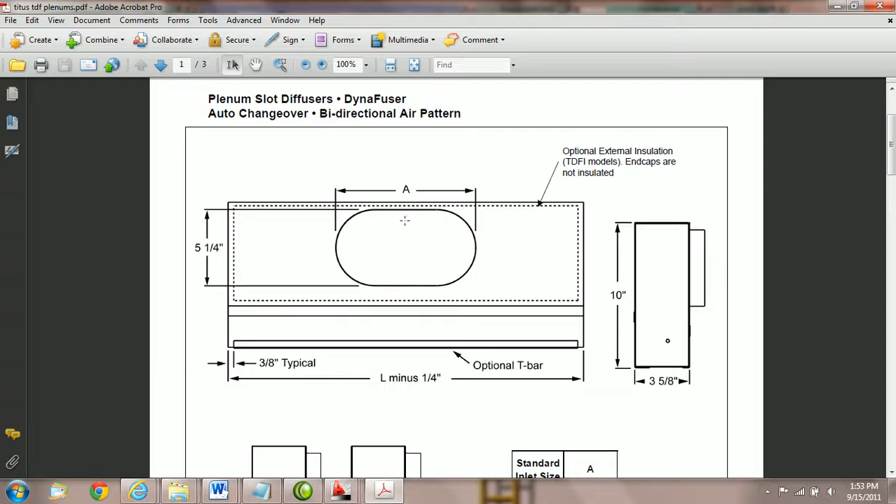The entity itself, you can see here, is a basic plenum box. We have dimensions for height and width. Dimensions are here for length. We're getting a major and minor for the oval tap. The only parameter that seems to be missing currently is the offset from the tap to the top of the box. Otherwise, the tap seems to be centered left to right.

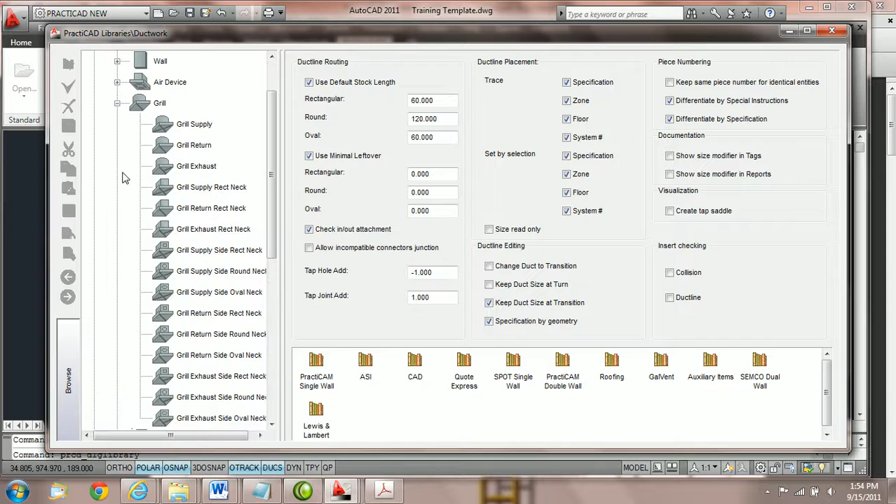So what we need to do first is go into PractiCAD, and we need to go into the library icon on your PractiCAD ribbon. And we're going to focus on the architectural section here. On the left-hand side, we need to make sure that we go to architecturals, and we're just going to hit the little plus key. PractiCAD is going to open up the list of choices. In this tutorial, we're going to focus on grills, and in particular, we're going to focus on the grill supply side oval neck. This has the proper parameters we need in order to catalog this plenum slot.

So what we're going to do here is create a new catalog, and to do that, we're just going to hit create a new catalog, and then we're going to name it whatever we want. We'll name this Titus TDF slots, and hit enter. I like to use capital letters whenever I'm naming my catalogs. It makes it easier to report the name later. I try to keep it consistent. I recommend doing the same.

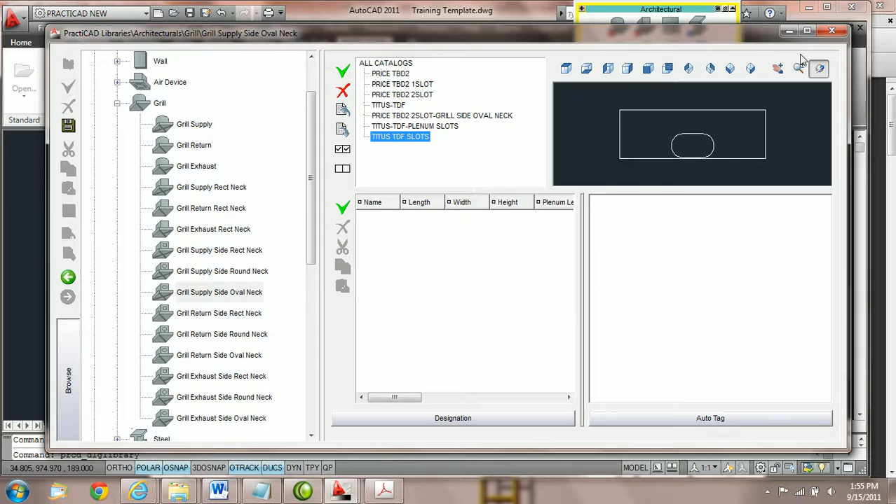Now what we need to do is create a new item. Before we do that, we're just going to open up by maximizing our library section, and now we're going to hit the green checkbox to create a new item, and we're going to call this 6-inch Titus TDF to start. That's going to be the first size. Now before we move on, we should look at the different parameters that PractiCAD is giving us for this specific entity. First, you can see we actually have a length, width, and height, and they're all currently set to 0.

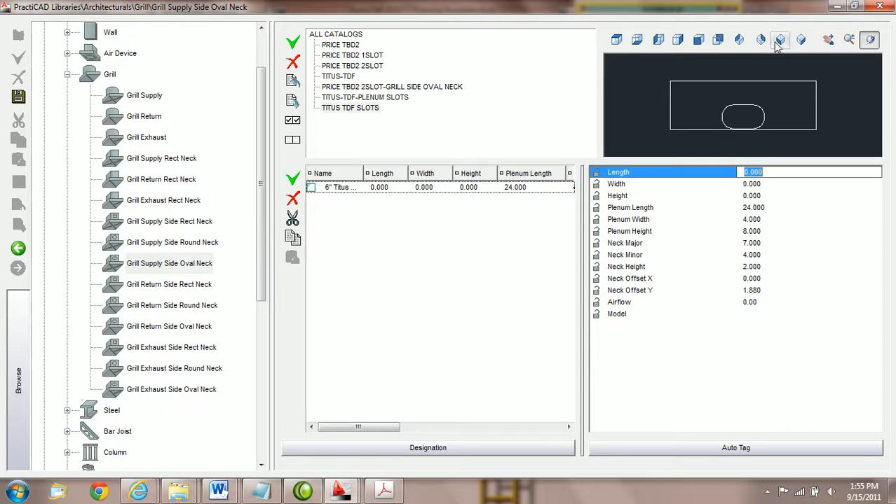What we have the ability to do is, besides just a plenum box itself, you can also have a lip or a flange or a face that's bigger than the box itself. It can be used for a variety of reasons, but you can see here that if we took the length and made it 28, and then the width 18, and then the height 8, you can see that we've got a box basically underneath the plenum box itself. And you can see the width parameter, length parameter, and of course your height parameters.

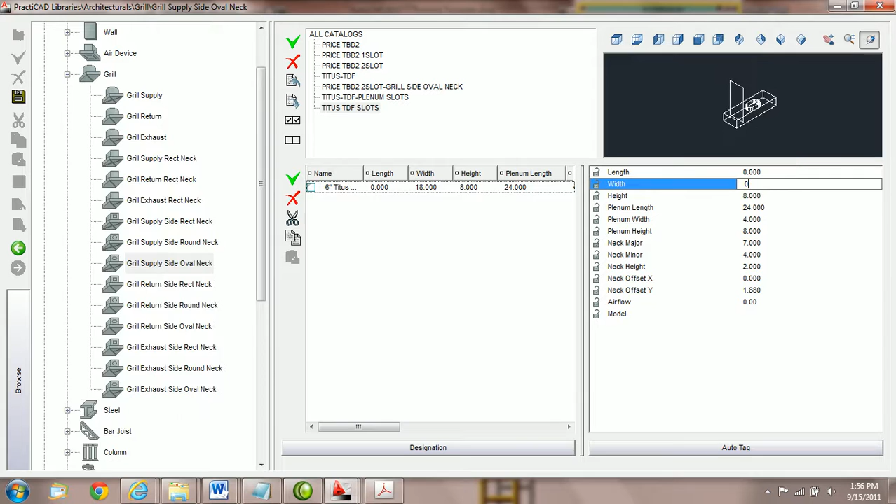And essentially, this can be used for a variety of things, but in this exercise, we only need the dimensions of the plenum box itself. So we're going to get rid of that extra section by making these values 0. And now all we're left with is the dimensions of the plenum box and then the actual tap itself. And that's all we need for this particular submittal.

So plenum length is 24 inches currently. We're going to go into our PDF. We're going to scroll down and see what we've got here. For our first 6 and 8 inlets oval, we use 24-inch length. So the length parameter is already set for us. Now we're going to go to plenum width. And we can see by just moving this parameter up and down which parameter that's controlling.

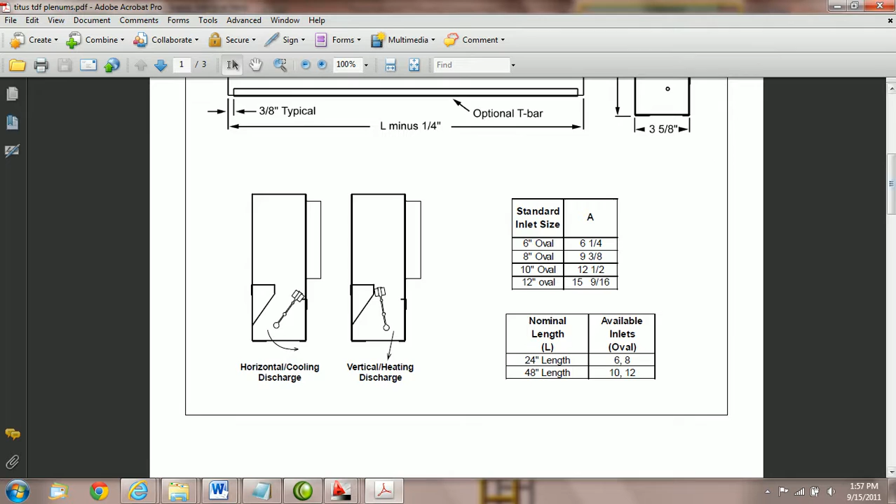And on our sheets here, we can see that that is actually dictated by this value right here, 3 and 5/8. So we're going to type in 3.625 for that value, and we're going to say plenum width will be 3.625 and hit enter. So now we've got it. The plenum height is also dictated on the sheet. You can see it's right here.

The height is 10 inches for the plenum box, so we're going to switch and make that 10. Now we have neck major and neck minor. Let's look on our submittal sheet. It seems that the minor is 5 1/4, but the major changes.

It's specified by parameter A here, and you can see we got standard inlet size. A should be 6 1/4 for 6-inch, and then 9 3/8 for 8-inch. So we're going to make the minor 5 1/4 and the major 6 1/4. So we come right here and say major 6 1/4, minor 5 1/4, and now we've got the proper opening for this particular 6-inch size.

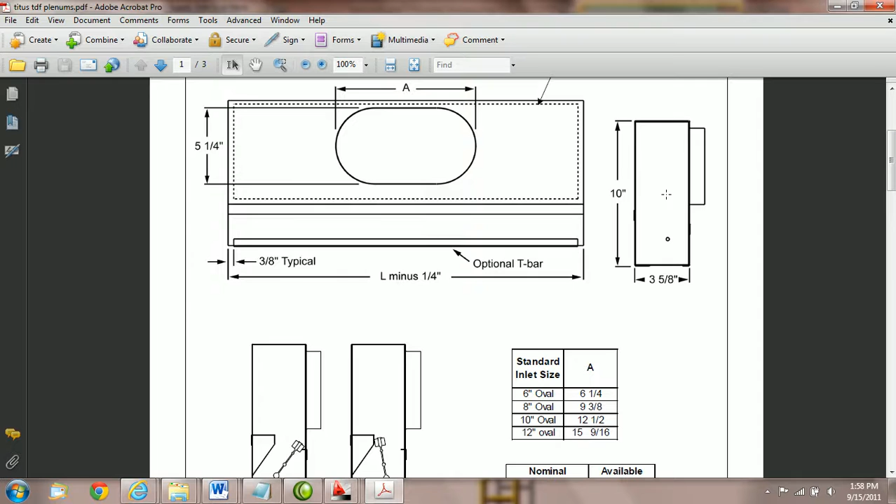We have neck height. Neck height, as you can see, is another parameter that's not specified, but for us that would be how far this particular opening sticks out of the plenum box. Probably best if you're not given a parameter to measure one of these actually and put it in your PractiCAD catalog so that your distance is correct. Right now we're just going to leave it as 2 inches, but you can see that extends the length of the tap per se. It's called neck height.

Now we have neck offset X. Notice that it's currently set to 0 and it's centered on the box. 0 keeps it centered for this particular entity. So if we were to raise the parameter, it would offset it left to right. But on our submittal, the offset X is centered, so we're just going to put it at 0.

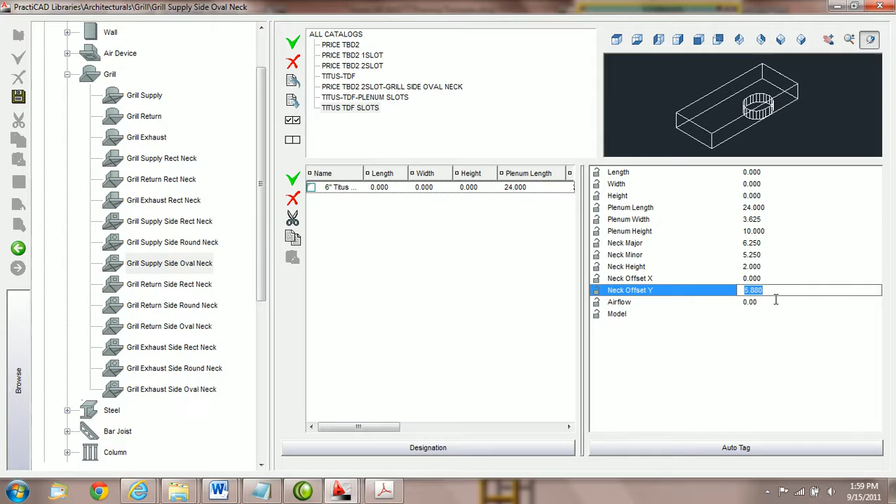Then we have neck offset Y, and that is the distance from the top of the neck to the top of the plenum box. And that is also not listed on our submittal. So what we've got here right now is 1 7/8, 1.875. And this was done just by measuring the actual distance. It might vary for you, but in this exercise, we're just going to give it neck offset Y. That's going to be the space between the top of this neck and the top of the box.

Now we've got the parameter for airflow. If we want to associate a CFM with this particular box, we can do it right here, or we can freely type this in as we place it on the drawing. And of course, we can also give it a model number, and both of these properties can be reported or tagged later on. So we've built one box.

Now once we've got one built, we're just going to hit create a new item while this is highlighted, and then we're going to call it 8-inch Titus. And what we've done is made a copy of exactly what we just did. So a lot of these parameters are going to be the same. The big difference is that the neck major is going to be larger for the 8-inch. But the plenum length and plenum width and height are all the same.

So we're going to say neck major, which was 9 3/8, so 9.375. And that's the only property we really need to change, because everything else is going to stay the same. And that's the nice thing about using catalogs and copying everything, is we don't need to change all the parameters. After you build the first one, the second and third get much easier. So we've created a catalog with two items for Titus TDF. We're going to hit save, and then we're going to bring them into our architectural bins. And now we're going to exit out.

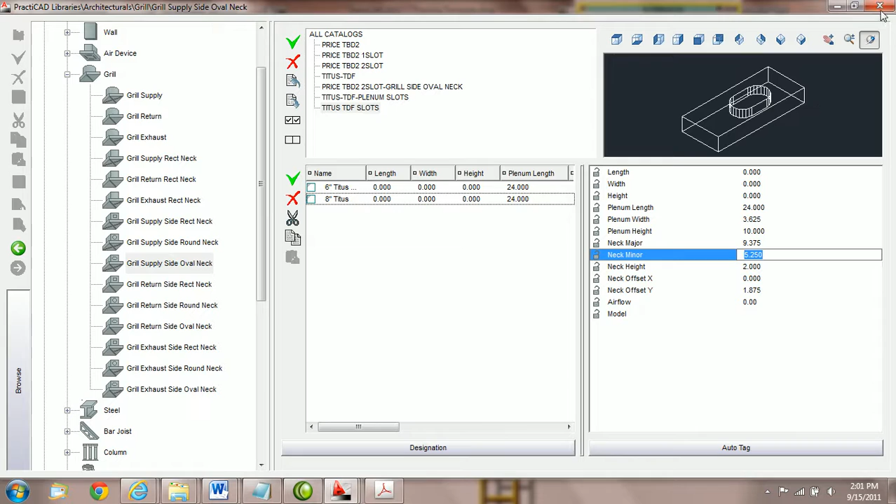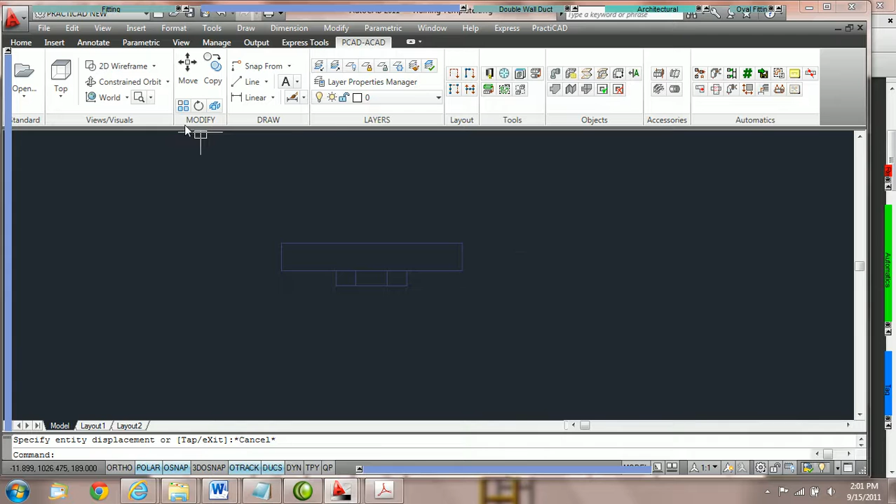Now all we need to do is open up our bin. We're going to grab a Titus TDF slot, and we're going to choose the one we want. We're going to say use the 8-inch, and we're going to place it on the drawing wherever we'd like to place it. Remember, you can rotate these on any X, Y, and Z plane. But here we've got a preset, already made plenum slot diffuser right out of the catalog. So that'll conclude how to design a plenum slot diffuser in PractiCAD.